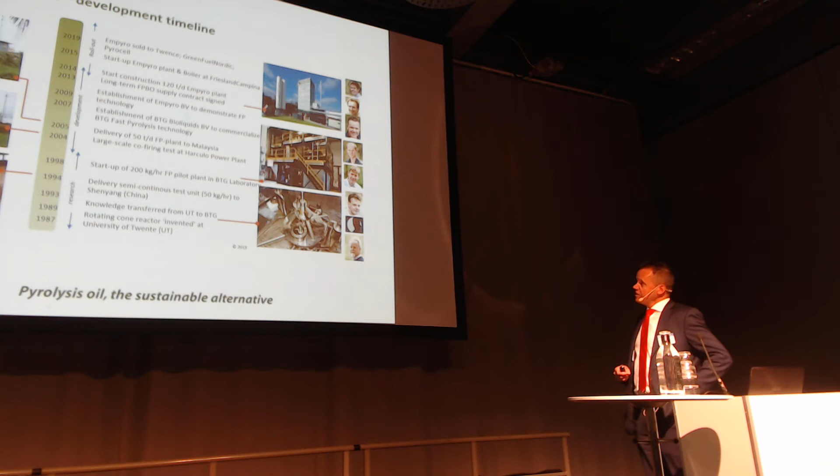What is exciting about this picture is not the technology, but the people. It's the people who make it happen. They invented the technology. They also improved the technology. And the funny thing in this picture is that all the people you see here still work with pyrolysis, except only one. Only one left us. The rest is still working with pyrolysis. It's the people who do it, not the technology.

What is fast pyrolysis? Very shortly, what we do is we heat biomass to around 500 degrees Celsius. We do it fast. That's why it's called fast pyrolysis. When you do it fast, the yield will be the highest. We are a kind of copy of Mother Nature. Mother Nature had more time. Mother Nature had around 200 million years, and we do it in several seconds. We convert the biomass into oil in 7 seconds.

That's not all. We're not only making oil, this is our technology. We are circulating hot sand and mixing it with biomass in our reactor. There's a kind of mechanical mixer of the biomass and the hot sand. This is how we achieve this fast heating up. We're creating a kind of oily smoke, and the oily smoke goes to our condenser where it's condensed. That's it. That's the total process. No catalyst, only temperature, and no pressure.

A very simple process; we believe it should be a simple process. No catalyst, no complicated stories, because why? We bring this technology to where the biomass is, close to the biomass. So no hydrogen, no catalyst, no complicated story, it should be a simple one. So decentralized technology to convert the biomass to crude oil. Then you can transport the oil and you can do anything you like with the oil. That's the concept. So heating biomass, getting the oily smoke out, and leaving behind the char.

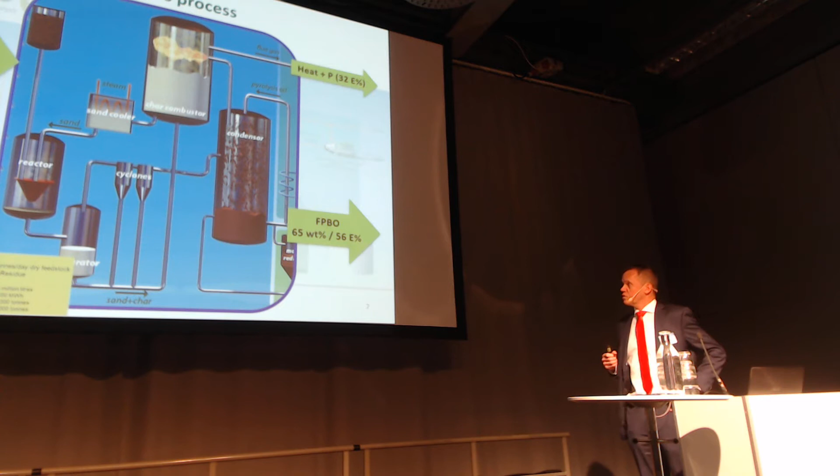Total efficiency is high, so we are converting around 5 tons per hour in, so every 1,000 kilo of biomass is converted to around 65% pyrolysis oil. And 32% is converted to heat, which we use efficiently.

Crucial to have an efficient technology. In the past, there was a lot of discussion about what is the best technology, what is the highest efficiency. I can tell you it's not about the efficiency itself, it's the total picture. It's more important to have a good price for your heat, for example, than to have the highest yield in your process. That's the total picture which is making it attractive or not.

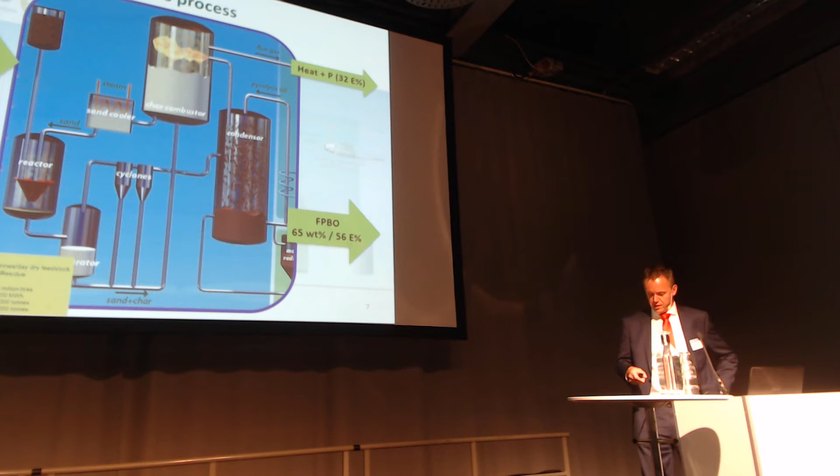March 2015, first oil was produced at Empyro. It's our first commercial plant. And to give you some idea, we made a lot of mistakes and we also learned a lot. And you can see it in this graph.

To give you some idea, in the first year, we produced 1,000 tons of pyrolysis oil. And now we're making 1,000 tons of pyrolysis oil per 2.5 weeks. That's a difference. The first year was not an easy year.

And to be honest with you, the funny thing was it was not about the core technology, but everything about all those practical, nasty things which are happening when you do something new. Typically speaking, if you would like to use a new technology, it would cost you around 3 years to reach maximum capacity and also a decent amount of handling costs.

That's really important, so I will not read everything which is here. Funny thing to say is that the plant is decent scale, 25 megawatt, and 7 operators in total are in the plant. So only 1 operator at a time.

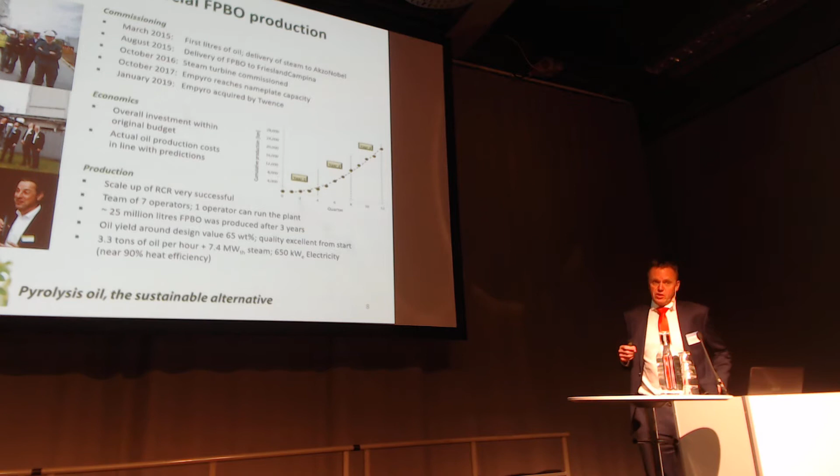We even are thinking to run the plant in night time unmanned. That's also called innovation. It's very important to lower your price and to make it interesting for the market.

We sold the plant in January 2019 to Twence. It's fitting perfectly well with our strategy. To be honest with you, there's also a surprise for us that someone else was interested to buy our existing plant, but it fitted perfectly.

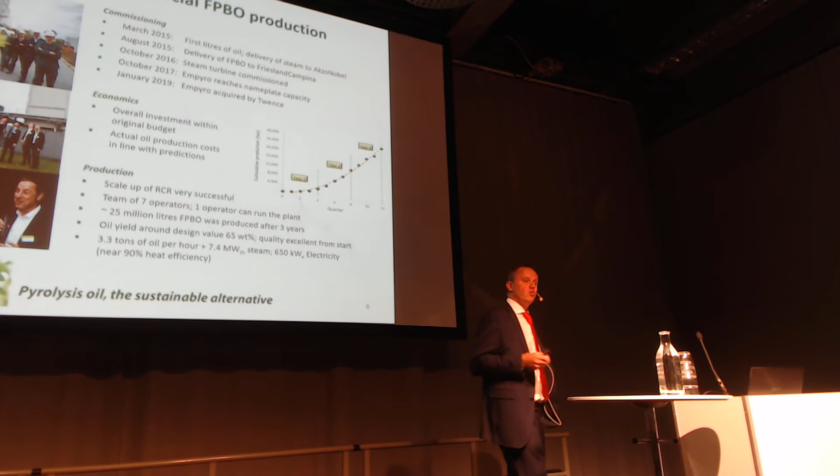Now we can concentrate on selling technology and doing projects, and Twence, which is an operating company, they can really run our plant in Empyro. We still have a 24/7 connection to Empyro, so we can still learn from the plant, which is crucial.

Go back again, March 2015 started with a pilot. Step by step also here, running steadily 24/7. Biomass was certified, crucial. We have the better biomass certificate. It's really considered a residue.

January 2019, and Empyro was acquired. In April this year, we sold our plant to Finland, GFN. And we just announced in September 2019 that we have sold our plant to Sweden, Pyrocell.

And the exciting thing about the last project is the fact that this oil is used by Preem in their refinery, which is a very big important step, because the refinery sector always said it's not possible to bring crude pyrolysis oil into the refinery.

If you repeat that to yourself and repeat it and repeat and repeat, then everyone starts to believe it. Preem said no, we believe it's possible. Whereas Petrobras in 2008, 2009 proved it's possible to bring this pyrolysis oil to a refinery.

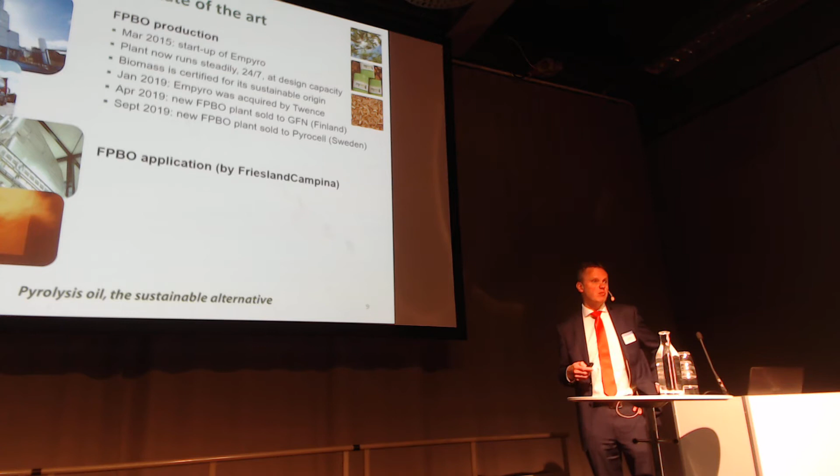I am very happy with the brave step of Preem. Also now I can see a lot of potential in the market. Other companies also want to explore this route. So there's always a long line for being number 2. And that's why I'm very happy that Preem has taken this very important step.

FrieslandCampina is using the pyro oil to replace around 10 million cubic meters of natural gas. And there's a total amount of greenhouse gas reduction of around 93%.

Commercial rollout. We are very proud that we have sold the plants both in Finland and in Sweden. It's costing a long time. We have to convince the market that things are possible. It's very important to spend time.

As I mentioned, you're around 11 years now for the company. And why did they choose our technology? That's a very important question. Due to the fact that we have Empyro, we have proven it's possible. We are making oil every day, 24/7. And that's the crucial thing. If you don't have the reference, people have difficulties to report.

So both customers, the Finnish and the Swedish, have been 5, 6, 7 times to Empyro to look at it. We have done a test with their biomass. It's also possible that if we have a specific biomass, it can be tested at Empyro. That's also what the customer has done. In both cases, we are using sawdust converted to pyrolysis.

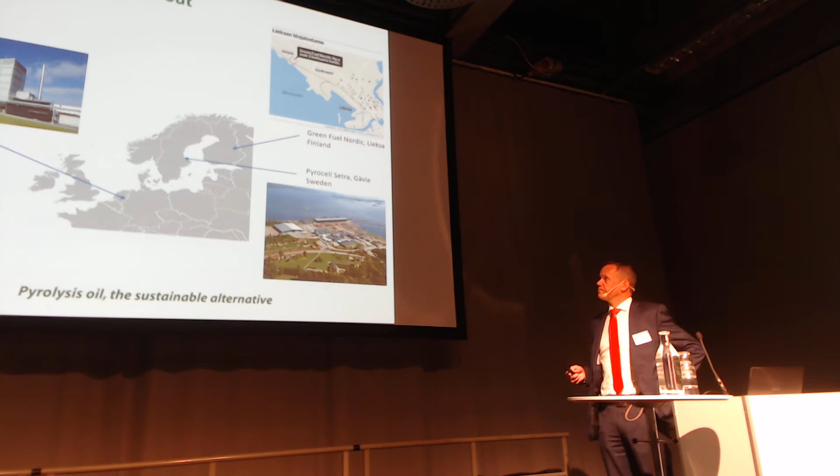BTG BTL is a relatively small company. BTG is around 35 people, BTG BTL is 10 people. So you can imagine that if you want to do a 25 million euro project, it's a challenge for customers - giving 25 million to a small company is exciting for them. So we decided to team up with TechnipFMC, a huge contractor in the petrochemical group, and we do projects together with them. Both the Finnish and the Swedish projects, we do together with TechnipFMC.

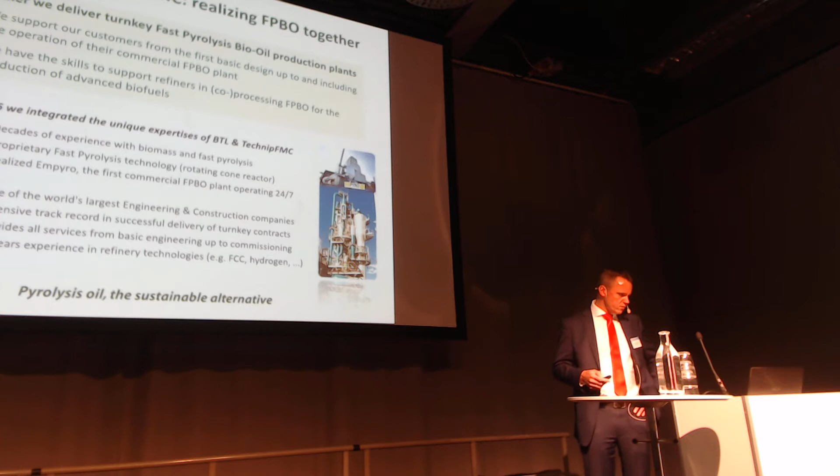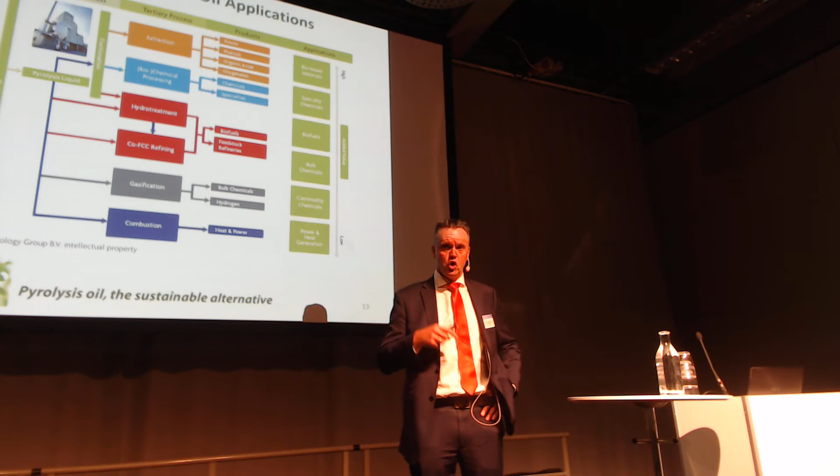That's the most interesting question. I think this morning Patrick mentioned it. It is very important to have an offtake agreement for everything. So if you have a high value added side and you don't have an offtake for the energy part, you cannot run your business. What we do is start a business with power applications and step by step valorize. Now people approach and say, could we use the pyrolysis to get some parts out? Yes, it's possible, because the residues can still go to the energy sector. Crucial - step by step, don't begin at the top.

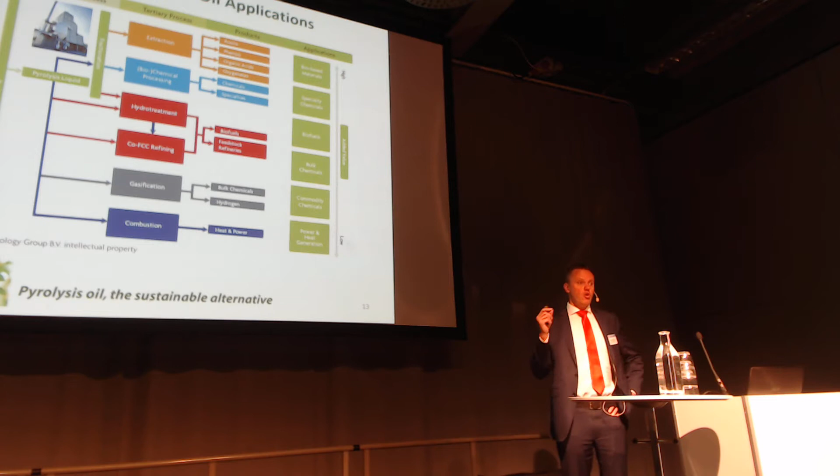It's fine if academia are investigating and researching these routes, but from a marketing perspective, don't start there. Start at the bottom and step by step go up.

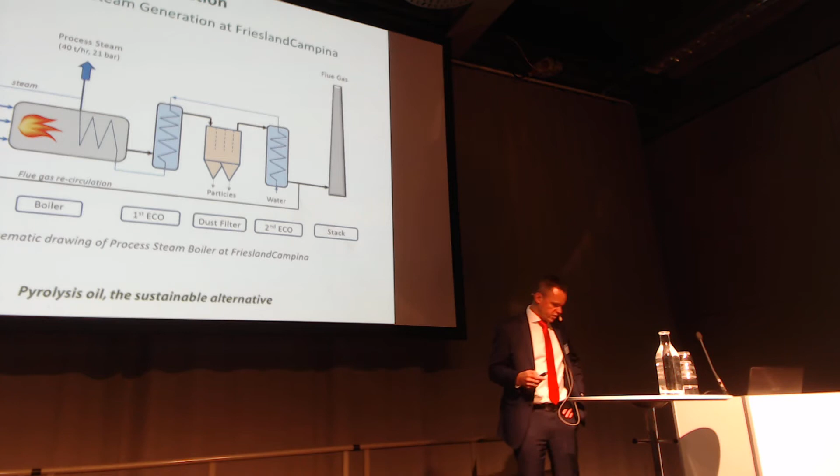Down to refinery - on the left side you can see our technology, and then there are several ways to go to refinery. The first one is untreated crude pyrolysis brought to an FCC refinery, under 5%. Easy, that's the first step. If you want to go higher, it's better to upgrade your pyrolysis oil - you remove part of the oxygen, and then you can go to a higher percentage in the refinery. Step by step, if you go to the MTF, you're making a complete end product, also possible with pyrolysis oil.

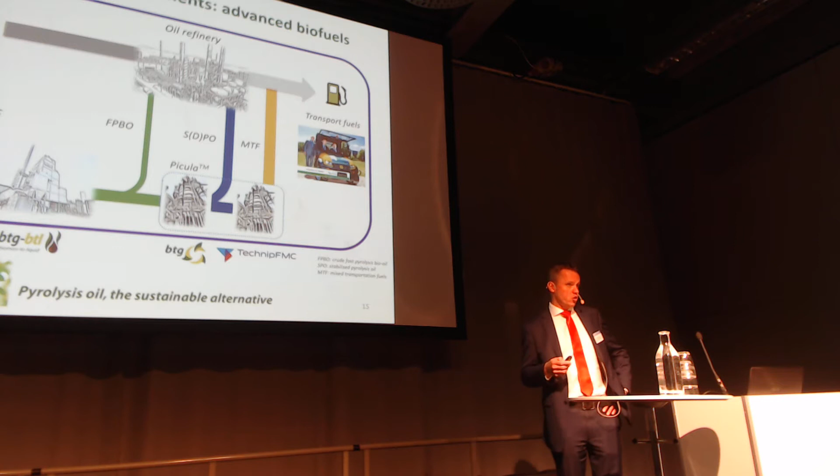This is how we do it - the cheapest way to go to a refinery to make second generation fuels. The other thing we need to do is make a connection on the riser of the FCC and co-feed the pyrolysis oil there. It's an investment of a couple of €100,000, that's it. Just feed it, and then you can see an interesting typical yield of the different pieces. We have dry gas, LPG available, gasoline, diesel, and also slurry oil. Up to 5% of this absolutely works perfectly.

The good thing is, by doing this, oil companies immediately comply with the Renewable Energy Directive - no investment, no couple of $100 million investment. Biomass owners will invest in the pyrolysis plant. The only thing that oil companies need to do is have an offtake agreement.

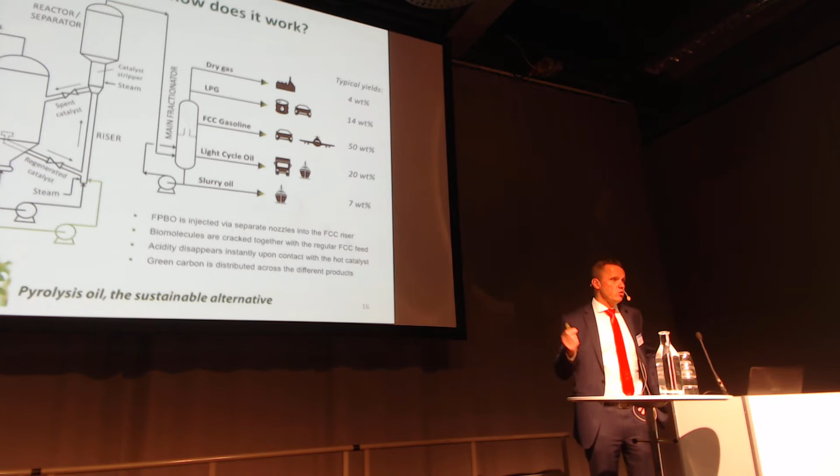That's it, last slide. With respect to time, I'll skip another point. In my presentation, at least I've given you an example of things which are possible at the moment. We are now rolling out this technology. My main market is especially Europe due to the Renewable Energy Directive, and especially here in Sweden, but also in Finland - it's an excellent market for our technology to start with. Thank you very much.

I have a question. What kind of products do you see as your main market, and why? Markets, products, like do you see feeding into a refinery as a main market in the coming years?

Yeah, I believe that feeding into refineries, that's our main market. It's supported all over Europe. And the second, also very interesting market here in Sweden and Finland, is to replace normal heat production. That's my two main markets: renewable heat in the boiler and feeding refineries.

Is there anyone having questions on this one? Those two questions. Yeah, thank you for your presentation.

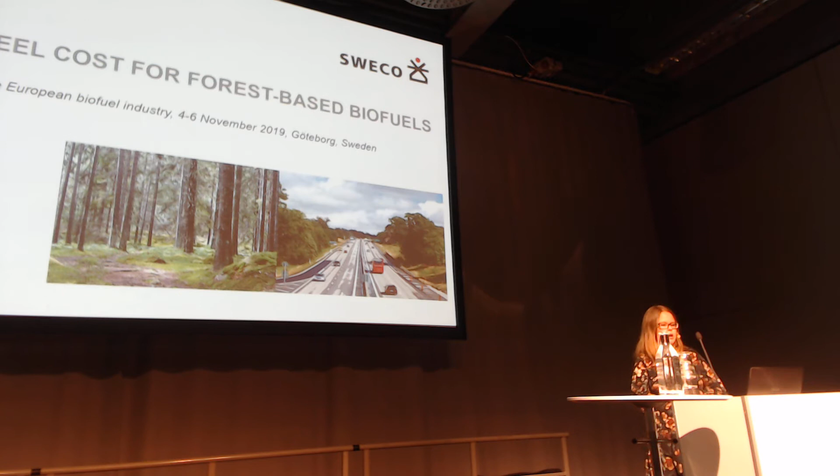The primary aim of the study was to estimate the well-to-wheel cost for forest-based biofuels. We focused on road traffic and usage in different segments in road traffic, and compared it with fossil fuels in this context. This comparison, based on the end user, illustrates how different renewable alternatives can compete with fossil value chains, and under which conditions there is potential for profitable biofuel production.

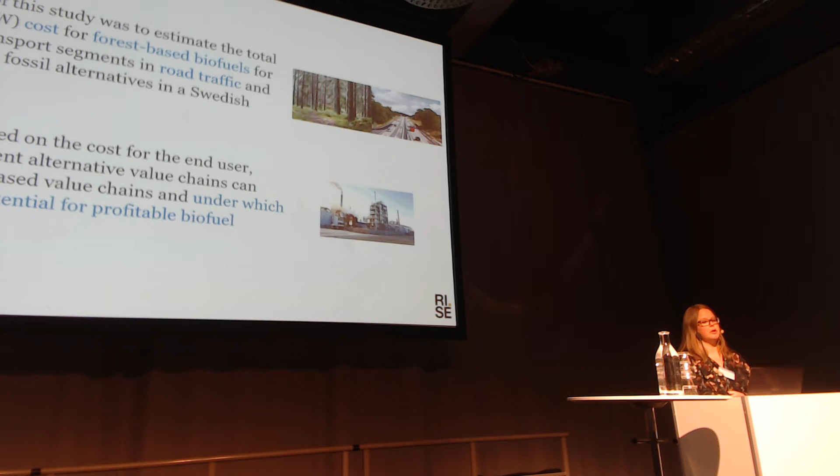Based on previous studies, we selected four different concepts for production of advanced or second generation biofuels: methane or SNG via gasification, methanol produced via black liquor gasification, a concept with ethanol and biogas, and a concept with renewable petrol and diesel from bio-oil, all integrated into existing industry to increase both energy and economic efficiency. For uses, we considered three different transport segments - here I will focus on the car segment as well as the long distance truck segment, but results for the distribution truck are similar to the long distance truck.

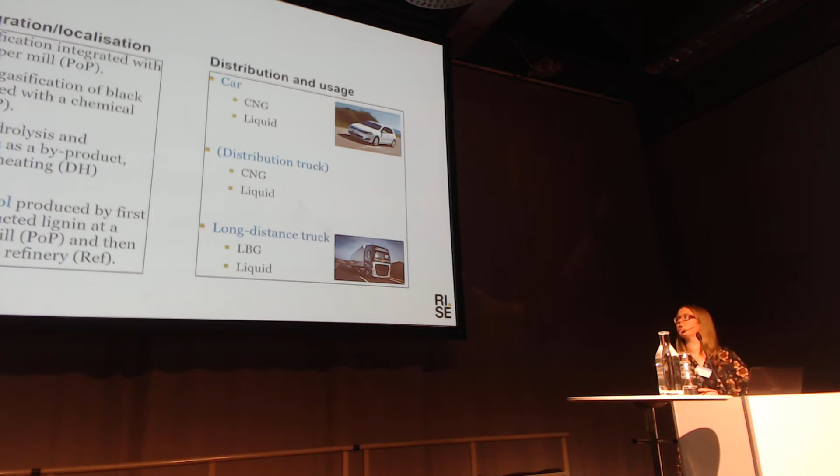So shortly about what we did and the main assumptions. This is the type of results that I will present. So the total well-to-wheel cost here, 2 examples with methanol and biopetrol for the car segment. And we indicated the cost for production, distribution, and vehicle, and compared it to a fossil reference.

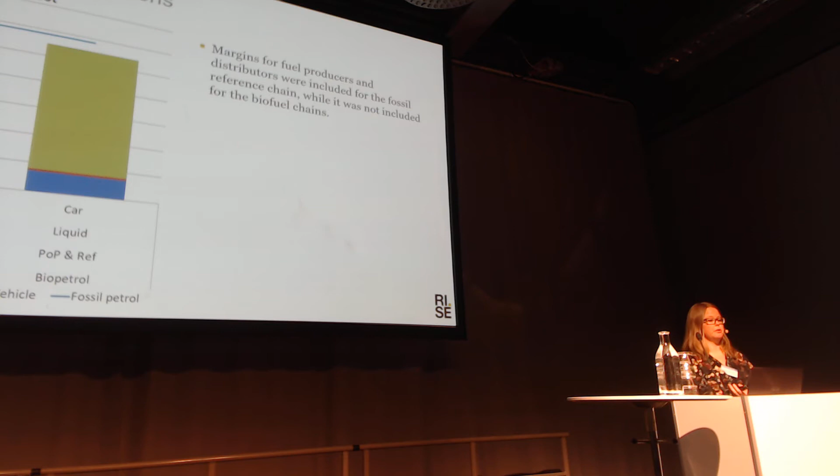And one thing is that for this fossil reference, we included margins for the producers and distributors. It's a total well-to-wheel cost for the end user. But for the biofuel chains, we didn't include any margins for producers and distributors. Instead, it's sort of a result from the comparison.

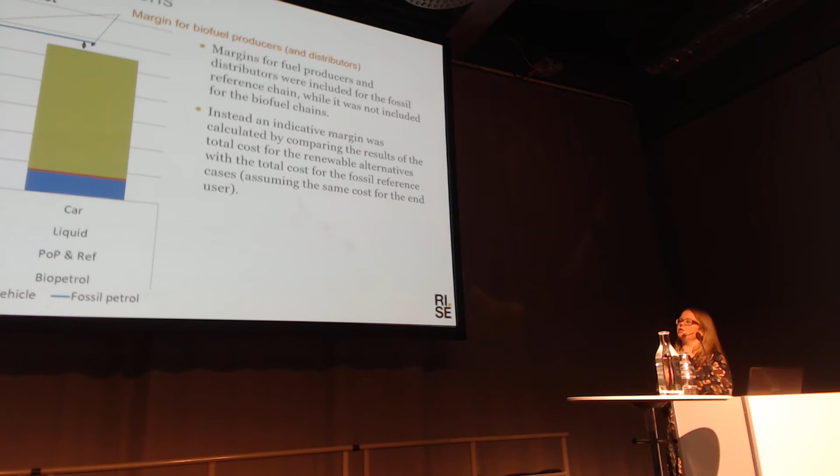So if we assume that the end user will have the same cost for fossil alternatives as for biofuel alternatives, we have an indication here: do we have any potential margins for producers and distributors of biofuels, assuming that the end user should have the same cost.

It's complicated to take it so short with so many assumptions, but we use current market prices in this study as well as the current policy situation in Sweden. But we have a time perspective that is 2030. So we, for example, assume that the technologies are in place, so to say, that they are commercial, and we have assumptions regarding, for example, plant performance. So that's quite important to stress.

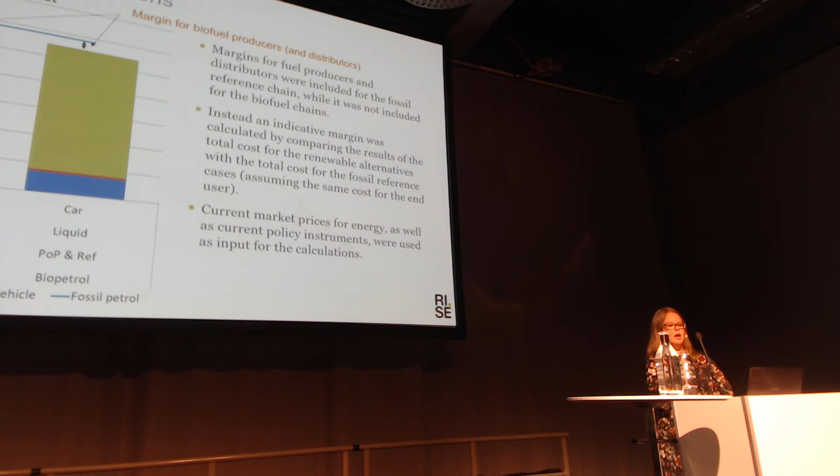And we looked at high blend or pure biofuels, so not drop-in. We consider all biofuels we study as high blend or pure biofuel, which in Sweden means that they have a tax exemption, so they don't pay the CO2 tax nor energy tax. So moving on to the results.

Here we can see the total well-to-wheel cost for the studied value chains for the car segment, and for those production concepts containing 2 different biofuels, we present the result per biofuel using energy allocation to make it more transparent. We can see here for the car segment that the dominating cost is the vehicle cost, dominated by the actual purchase cost per vehicle divided into cost each year.

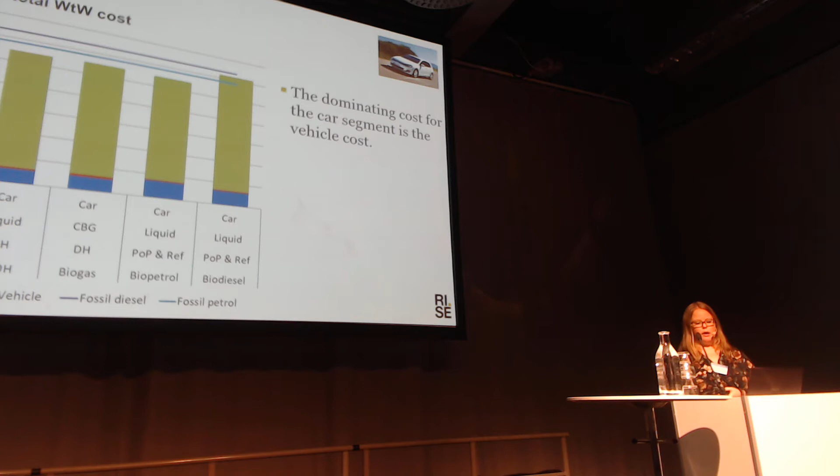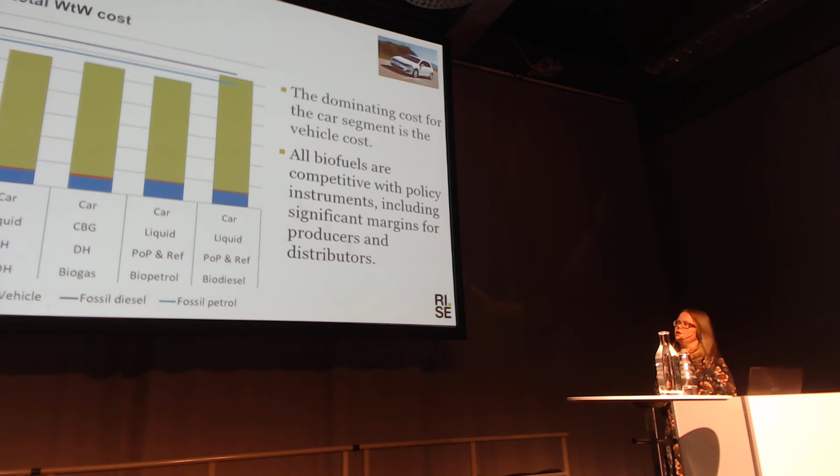And if you compare these first ones to fossil petrol and biodiesel to fossil diesel, we can see that all biofuels are competitive. And we actually have significant margins for producers and distributors. Maybe a margin in crowns per kilometer doesn't say that much.

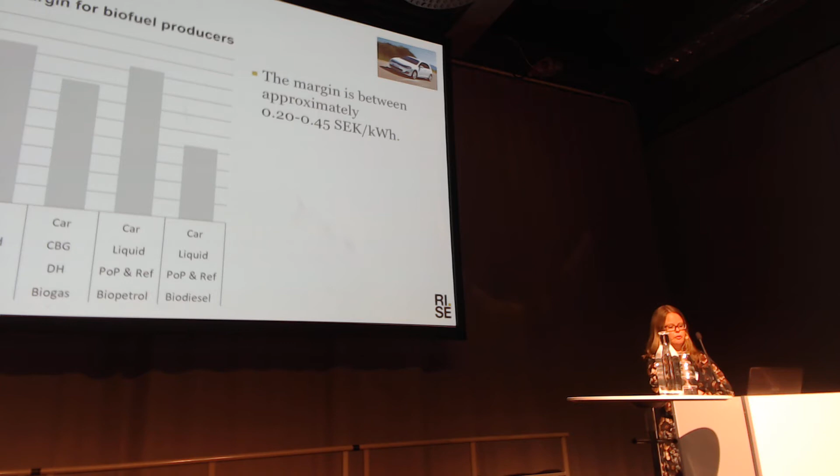So if we convert the margins to crowns, approximately 10 crowns is €1, per kilowatt hour biofuel, we have a margin between 0.2 and 0.45 crowns per kilowatt hour for the different biofuels. And then how important is this tax exemption from the energy and CO2 tax? It adds about 0.7 crowns for petrol and 0.5 crowns for diesel.

So then one can conclude, looking at the numbers here, that without these policy instruments, the biofuels are not competitive compared to fossil fuels. In the study, we present results both with and without policy instruments, so we make the effect clear in the report. I don't have the time to show all the results here.

But in addition to the sensitivity analysis when it comes to policy instruments, we did quite an extensive sensitivity analysis for a number of factors. The one shown here is actually the one with the largest impact, and it includes, for example, the biomass price, the crude oil price, and how you price the excess heat from the biofuel plants that is used at the host industry.

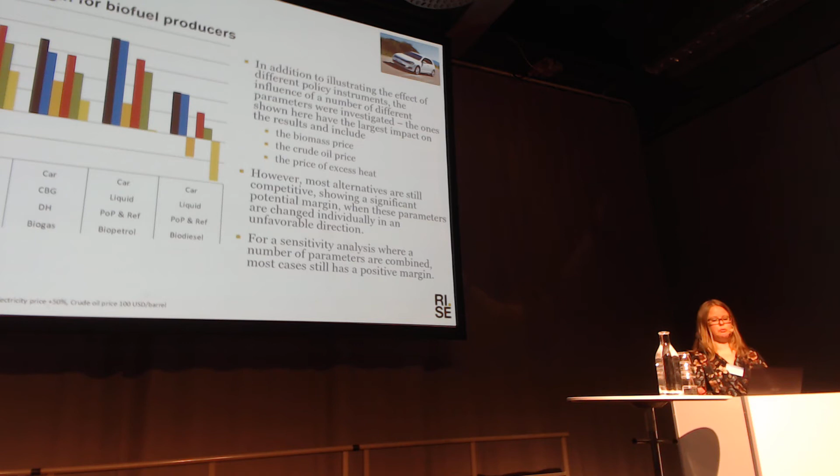But we can see here that most alternatives are still competitive, and we still have significant margins even when we change these parameters in an unfavorable direction for the different alternatives. But we can see, for example, that this biodiesel is quite sensitive to changes. In the sensitivity analysis, we combine a number of factors, but still we have a positive margin for almost all the alternatives studied.

Moving on with the long-distance truck segment and the results there, and the total well-to-wheel cost first. The first thing we can see is that the vehicle cost here is less dominant compared to the car segment, and the reason for that is that the average distance traveled by a long-distance truck each year is much longer than a personal car, and of course then the variable cost becomes more important for the truck segment. And also here we can see that all biofuels have lower cost compared with the fossil reference.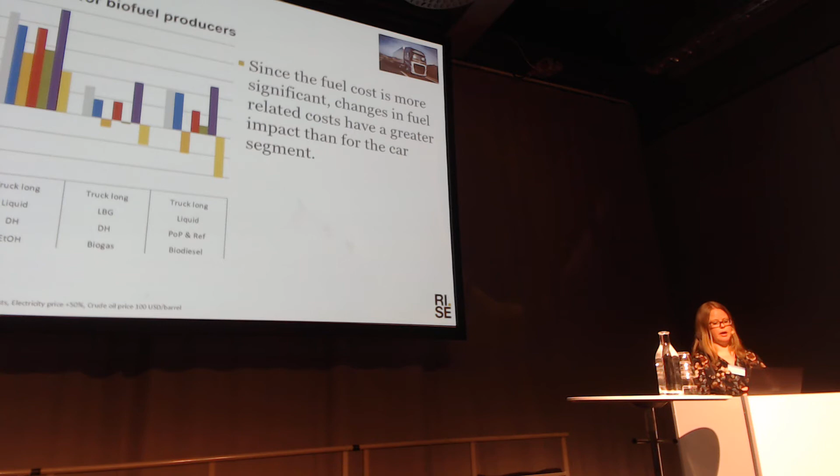And since the fuel cost or the variable cost has a more significant share here for the truck segment, the results are also more sensitive to changes of those parameters. For example, here we can see that both the biogas and biodiesel value chains have small or even negative margins for some of the parameters studied in the sensitivity analysis.

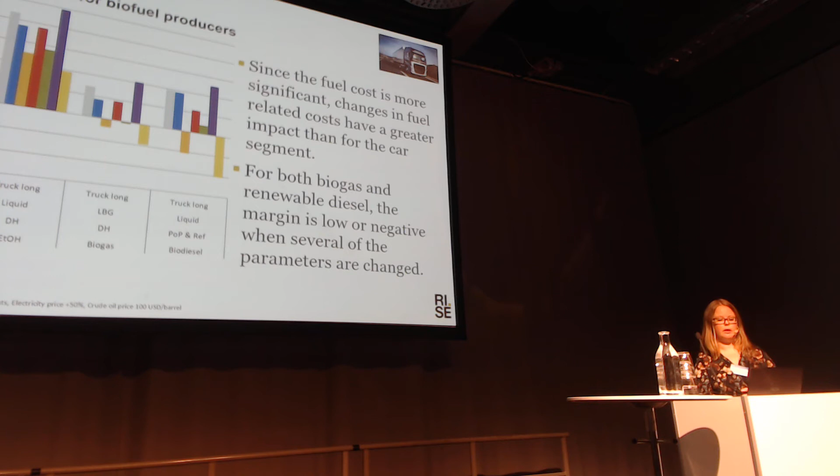So, moving on to the summary and conclusions. All the studied value chains or biofuels in this study have the opportunity to be profitable with the current policy situation in Sweden. Here's a summary showing the margin for both the car segment and the long-distance truck segment. Looking at the specific biofuels, methanol and ethanol actually have the highest average potential margin for producers and distributors, which is also very stable across different transport segments. But also SNG and biopetrol have very high potential margins.

I can say something about the size of the margins because you can relate them to the production cost for the biofuel that we estimated here, which is between 0.5 and 0.85 crowns per kilowatt hour. And also the Swedish Energy Agency estimated the margins for production of fossil petrol and diesel to between 0.1 and 0.15 crowns per kilowatt hour.

Biodiesel and biogas have a somewhat lower but still relatively high margin, but they are more uncertain, and when changing certain parameters, they will have very small or negative margins. And if we look at the production processes, which in some cases are a combination of different biofuels, it's the methanol, SNG, and ethanol-biogas concepts that all have significant margins also when parameters are changed radically. This is not the case for the biodiesel-biopetrol process.

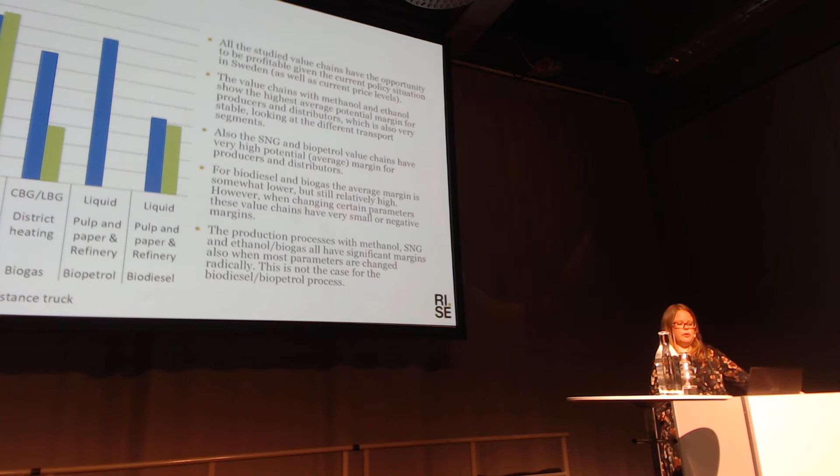Olaf from the Swedish University of Agricultural Sciences. Can you elaborate a little bit on the production costs? They look quite similar for the different fuels. Yeah, they are quite similar. As I said, it's in the range between 0.5 and 0.85 crowns per kilowatt hour, and it's lowest for the SNG process and highest for the biopetrol-biodiesel concept, and the other ones lie in between.

So it's the production cost we estimated using current market prices for both biomass and other chemicals. And we assume, as I said, that integration is a very important issue here. All the processes are very energy efficient and integrated into existing industry, and that also reduces to some extent the capital investment, using existing infrastructure and replacing their need for investments in new heat and power capacity.

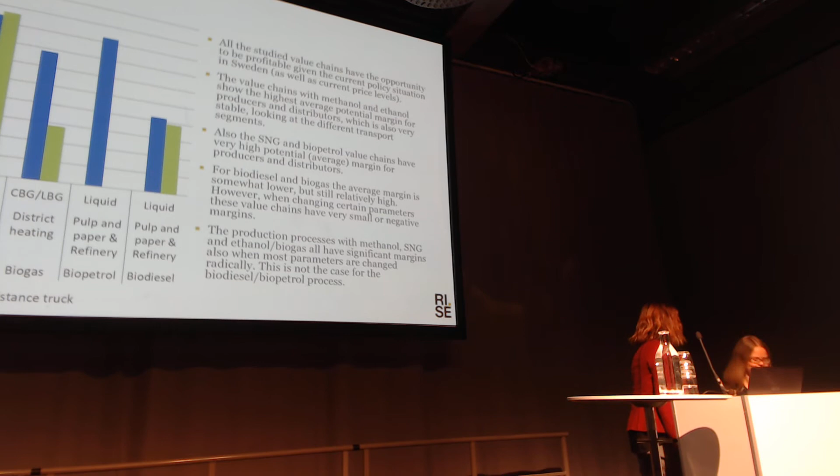And now we have the next one with the bioethanol, replacing Olaf Trygve Berglihn, and he is going to walk us through how to distill the ethanol in a hybrid process. Looking forward to it.

Thanks for the introduction. My name is Bernd Wittgens, working for SINTEF as a senior advisor, and as Judit said, I'm replacing Olaf Trygve Berglihn, who was supposed to give the presentation. The previous presentation was basically on costs. Now we try to find out how to modify the process and reduce the production costs.

The outline: how is ethanol produced? We need to get rid of the water. What kind of experiments have we done? And how to integrate two completely different processes into one process, which makes it better. And then some conclusions and an outlook.

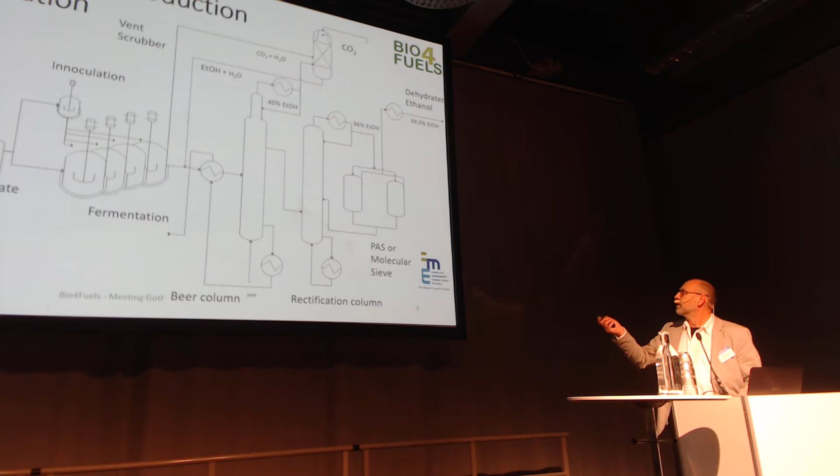Bioethanol is produced by converting some substrate into hydrolysate, meaning make sugar, run them through a fermenter, and then current technology is we use two distillation columns, first the beer column and the rectification column, and then we have to get rid of the rest of the water by, for example, a molecular sieve process. Those processes are relatively well known. They have one challenge: they are energy intensive.

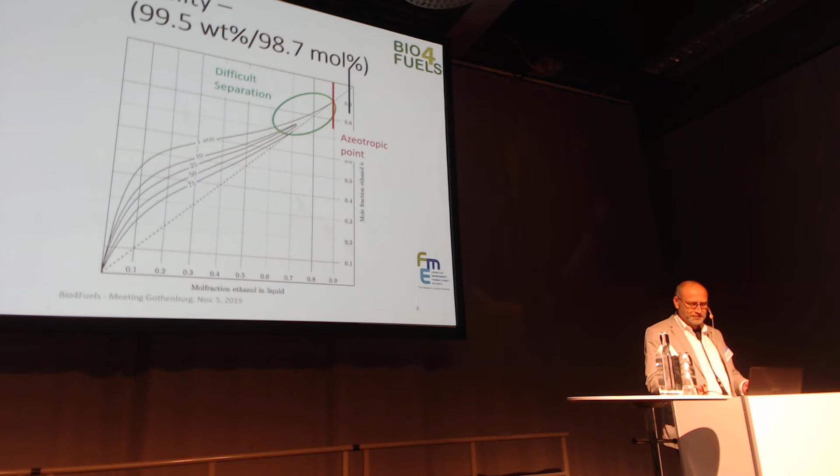When we want to have fuel, we would like to have 99.5% weight of ethanol. The problem with ethanol and water is you can, by distillation, only get to a certain point, and then you can't separate it anymore. So you need to have a second process behind that. We looked into that, and we had a project which started with a bioreactor, putting the membrane system into the bioreactor to get the ethanol out of it. Very nice idea, doesn't work. It's that simple. So we need to find an alternative way to do that.

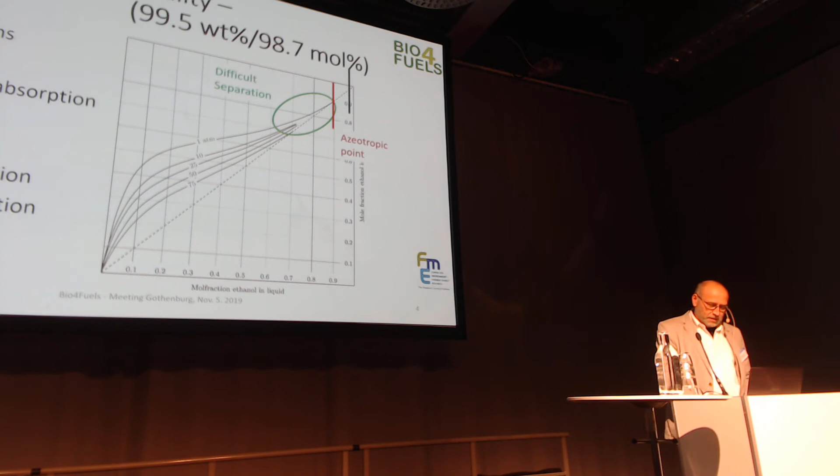So we went back to our initial idea. We run the distillation for the first part, and then we take the difficult separation part to other processes. And we looked into 5 alternatives. The interesting part with these 5 alternatives is they bring you from your physical limit, which is the azeotrope, to your fuel concentration.

A little bit on membrane separations. What's the problem? The problem is very simple. If you run a pervaporation process, that means you drag ethanol as a vapor through the membrane and you put it into the broth. You have particles in your broth which foul the membrane. That means it will clog in no time. You have a very poor driving force.

Let's say you start with 5% ethanol in a water mixture, which is standard for a fermenter. You want to get up to 70 to 80%. You use a lot of energy for that. And your product, ethanol, has to be condensed at a very low pressure. That means you need a very low temperature, which costs, again, a lot of money. So that baby doesn't work.

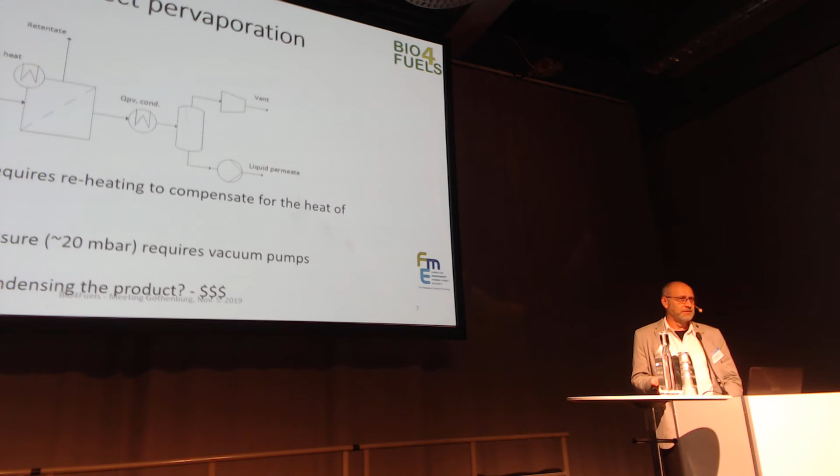So when we ran that project, we ended up with vacuum pumps which need to be operated at 20 millibar absolute pressure. Every engineer will say that costs a fortune. The other part is if you want to condense your ethanol at 20 millibar, it's even more expensive. So we put that to the side.

And then we looked into whether we can make a trade-off of our driving forces. So we came up with a very counterintuitive idea. If you increase the pressure in the distillation column, your separation gets worse. But on the other hand, if you increase the pressure, we have a higher driving force for our permeation process. So balancing these two is basically the key to what we've done.

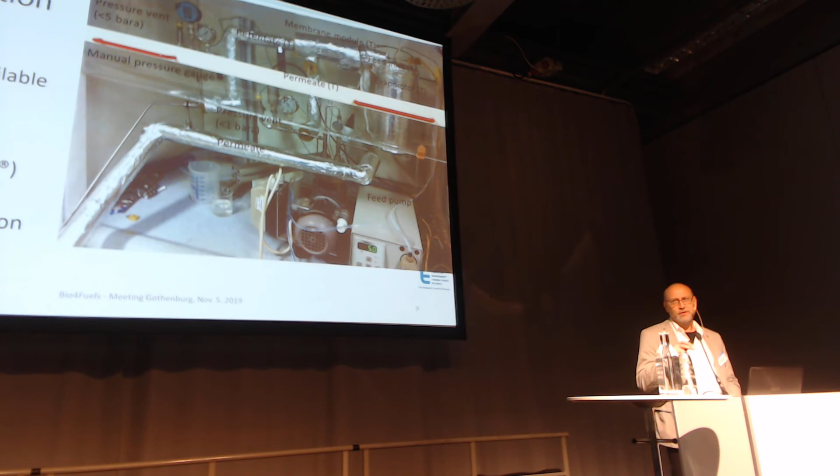So we built a small system, used a commercial membrane for pervaporation, which is actually not designed for that process. The membrane is designed for feeding a liquid into the membrane system and drawing out vapor. What we did, we fed vapor into the membrane, which the supplier told us in the start is not possible.

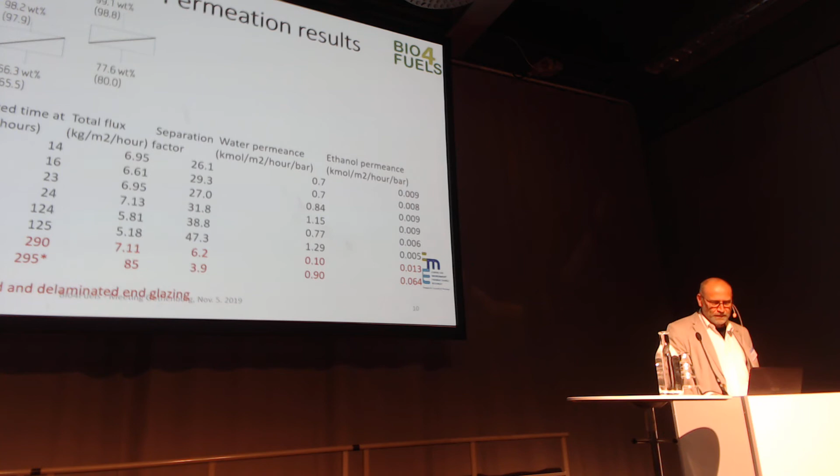Of course, we tried, and surprisingly enough, it worked for quite some time. See the operation times, we operated it for about 125 hours. We get quite a high flux through the membrane, and then our membrane broke down. And that was because we run the system up and down all the time, and the membrane is not made for that. So, as the previous presenter said, we learn from our errors. So we made another system which we operated in a different way, and that worked for quite some time.

So how does the process look? We still have a distillation column in the start, and then we exchange the second separation column, the dewater and the dehydration section, with one membrane section. So we basically reduce more or less 60% of the process capital costs. They're removed. So we get a much simpler process. Okay.

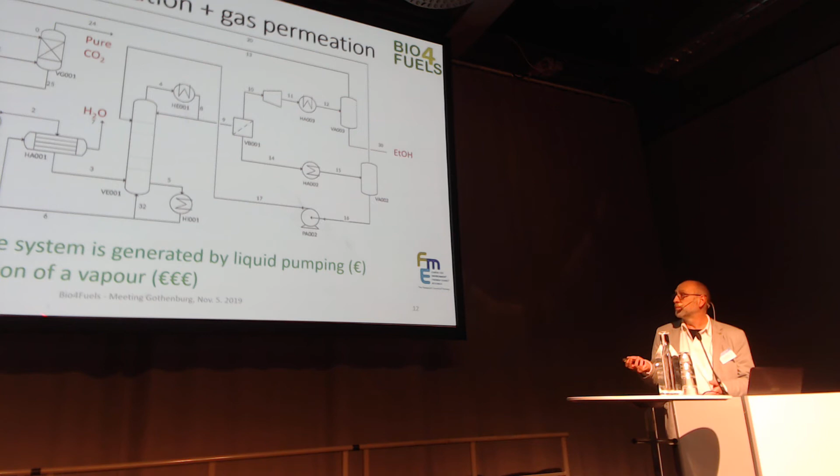And why is it much cheaper? Because we generate our pressure by pumping a liquid. This costs close to nothing. Compressing a vapor is relatively expensive, especially if it's a vapor which additionally condensates, which makes it even more complicated.

So then we ran the energy analysis of the two processes. We compared them. We used data from an NREL paper from 2011. They have two distillation columns, a molecular sieve section, and the separation costs about 7.4 megajoule per kilogram, just for the separation costs. We leave out the cost for the feedstock or the fermentation, just to make it simpler.

In the process we developed, we have one distillation column and a gas permeation membrane. The data we get from Pervatech and our own data are about 9 kilogram per hour per square meter membrane, which is quite large compared to the original data, but that's because we feed in a vapor, not a liquid. So we reduce our energy consumption by about 18%, which is quite substantial because the distillation is a major energy consuming part of the process. So if you get down this energy consumption, it also reduces your operational costs.

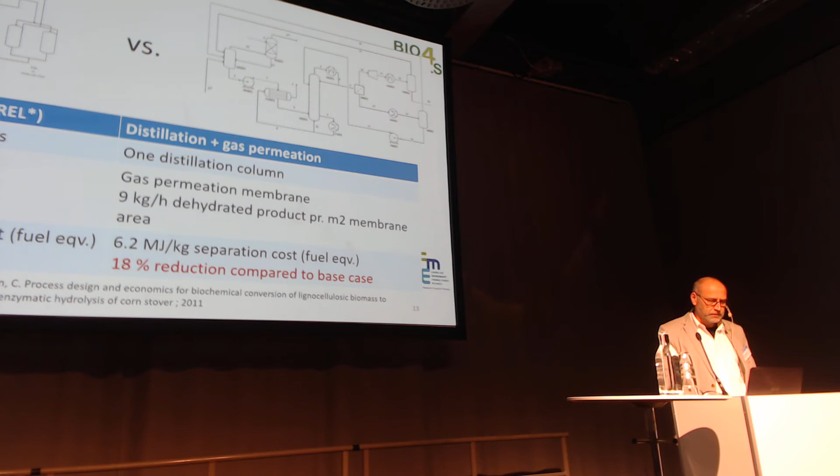Conclusions? Integration of distillation and pervaporation. It's a classical process intensification approach. You take the simple part of the optimal operation range of two processes, integrate them, and you get a much better process. However, we have to make a trade-off between the separation efficiency in the distillation column and increasing the driving forces for the permeation section. So it's not straightforward. You have to play with it and find the right combination.

It's a very much simplified process because those membranes will never ever foul. All the fouling is happening in the distillation column and beer column, and that is handled in industry. We have done that for about 2,000 years to produce alcohol for drinking, so that problem is quite easily solved. We have a much better energy performance with the scheme we designed, and we have comparable or lower capital cost with the proposed scheme.

But there's a drawback. It works only for processes where we have a low boiling alcohol, a low boiling liquid. Our solvent is water, which has a 100-degree boiling point. Ethanol has 78.4 degrees, so that works nicely. If you were to produce butanol, it will not work. Butanol is a higher boiler than water. So we need to play with that a little bit more to see if we can use it in the same way.

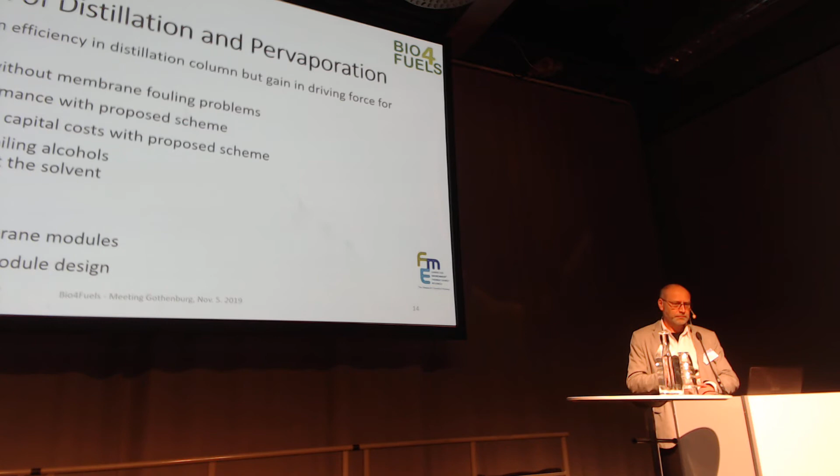Where are the challenges and the outlook? The membrane modules today are relatively costly. And as you've seen, they have a tendency to crack. So we need to make them more robust and we have to reduce cost. And also we need to perform a rigorous technical and economical evaluation, and that is ongoing in the Bio4Fuels project. That concludes my talk, and I will be happy to answer your questions.

Very interesting. My question is, where you are at this TRL scale, how far is it from real commercial value? None of the systems is new, everything is industrial scale. It's just the integration of the systems which is different. So basically, each individual process is TRL 9. Integrating them, I haven't seen that in industry, but it has been done in pilot runs, but for a different application.

Because what you do is, in the separation step, you're not separating the alcohol from the water, you separate the water from the alcohol. So you drag the water out of the system, which, after you distill it up to 60–70%, is the simplest way. And those membranes are readily available, and they are relatively cheap. But the integration has not been done so far. Do you see a potential for retrofitting existing plants? Yeah, definitely. Okay. Any questions from the audience?

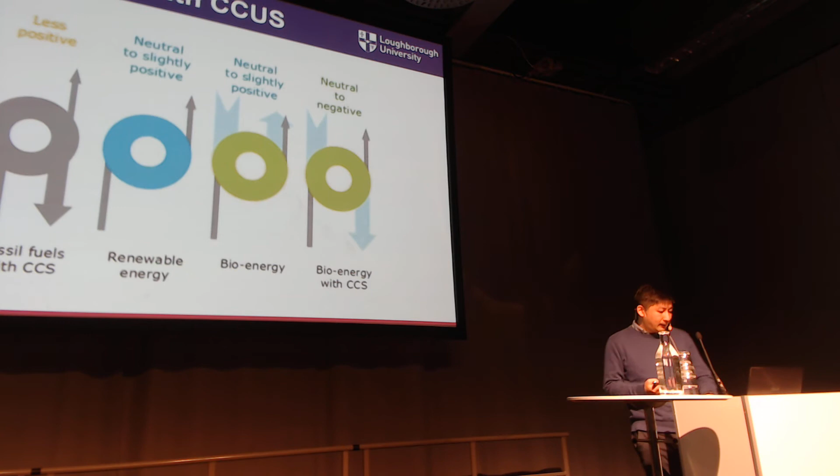So Supergen, the Bioenergy Hub and the Department for Transport released a call for this flexible grant, and they asked us particularly to look at bioenergy together with CCUS, carbon capture, utilization and storage, because BECCS is one of the very few solutions that can provide negative emission energy supply. If we think bioenergy is neutral to slightly positive carbon emission, then bioenergy with CCS or CCUS will give us a solution of neutral to negative carbon emission. We don't need the entire national energy supply to be carbon negative, but if we want to achieve net zero emission by 2050, we do need a proportion of energy supply to be carbon negative.

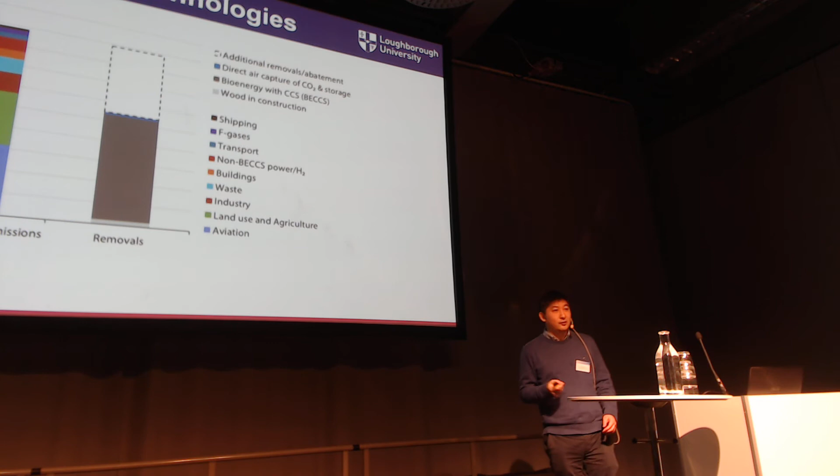And as you can see, there's still a blank area here where at the moment we don't know how to deal with this carbon emission residue, which means probably we need to move forward the state of the art of bioenergy with CCS to enhance its potential so that it can offset more carbon emissions.

So as I said, biofuel with CCS will play a very important role in the UK's emission removal and offset. And so with this content, we propose a so-called e-biofuel-based circular economy concept.

So the core is to use the electrochemical process to develop biofuel and at the same time reduce carbon dioxide into useful fuels. So if we start from renewables, biomass, or waste through different bio-based processes, for example fermentation, then you will probably get some intermediate like carboxylic acid. That intermediate itself is a useful molecule, but sometimes, or in most cases, we want to upgrade it into fuels or more value-added chemicals.

We can do this through an electrochemical process with the input of renewable energy. For example, we can get more energy-dense alkanes from the carboxylic acid. The fermentation process will generate quite a number of carbon emissions, and of course the end use of the fuel will also generate carbon dioxide and waste.

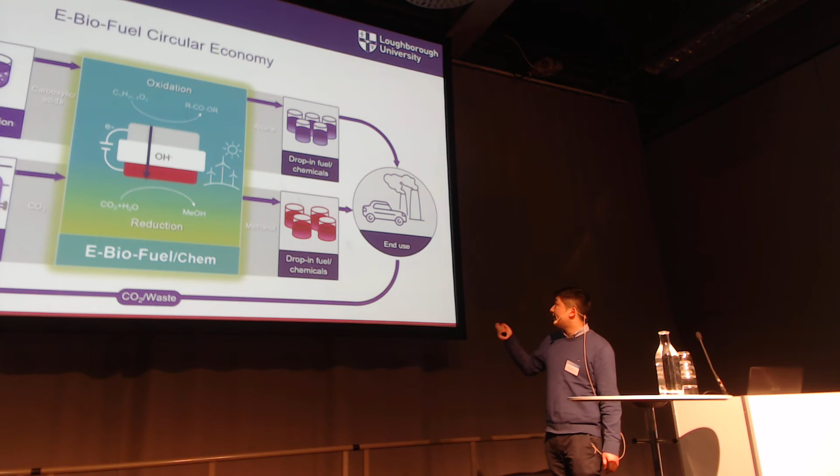So if we integrate carbon capture and use, again using the electrochemical process to convert the carbon dioxide into something useful, typically methanol, ethanol, or formic acid whenever possible, then you can get two types of fuels, two streams of fuel production on the same electrochemical unit or process, and then you close the loop of the carbon to achieve potentially sustainable and negative emissions.

So I would elaborate a little bit more about the fundamental science and chemistry behind this idea. As most of you know, the electrochemical process typically involves two types of half-cell reactions, the anode and the cathode - one is oxidation, the other is reduction.

So if you want to reduce the CO2, it's a reduction process, which means at the cathode you reduce the CO2 into some fuel like methanol. And it has to be accomplished with an oxidation process, most typically the oxidation of water to generate oxygen. The only useful part is the CO2 reduction, but more than 90% of the energy is actually used to overcome the water oxidation - only 10% of the energy would actually be used for CO2 reduction.

The same applies for biomass valorization. It can be both reduction and oxidation, but here we talk about oxidation - for example, selectively oxidizing the carboxylic acids into alkanes. Then you need to accomplish this with another half-cell, water splitting, and again more than half of the energy is wasted here.

And with the oxygen generation this also causes problems in these kinds of systems. So our idea is to get rid of the unuseful part and combine the useful electrochemical reactions to generate this new e-biofuel system, or bifunctional electrochemical system. So on one side we reduce the carbon dioxide to methanol, and on the other side we selectively oxidize the carboxylic acids into alkanes, so that we maximize the usage of electrons and the energy in the electron flows.

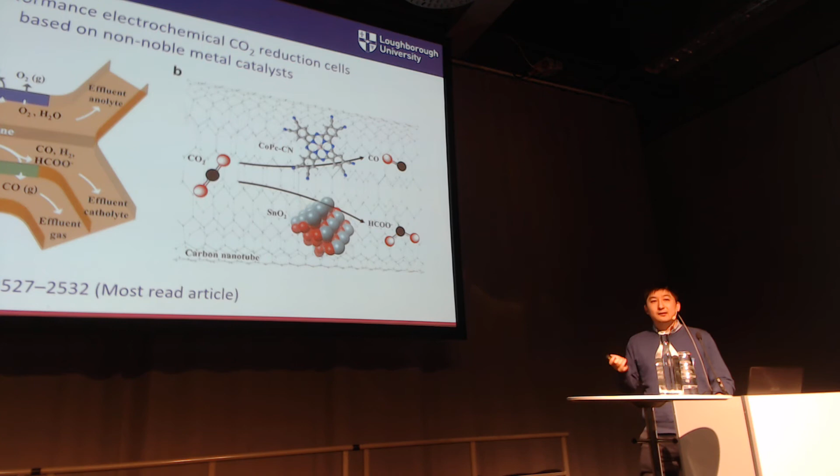So this project is essentially to use this chemistry and build a novel process that can do both jobs at the same time - a synergistic integration of anodic carboxylic acid upgrading and cathodic CO2 reduction. The ultimate goal is to intensively reduce emissions and increase the sustainability of the road transport sector. So we want to build road transport fuels through these new processes.

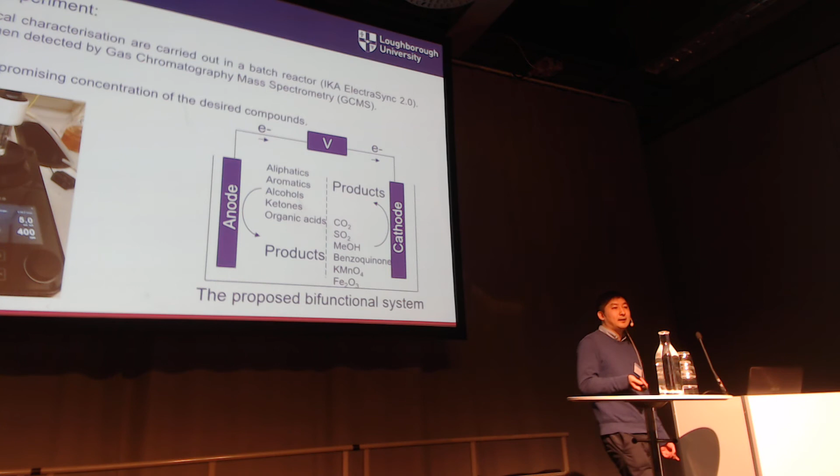Throughout the last 6 months we got some initial results. The project is proposed in 3 work packages. The first is about experimental work to prove the concept, using state-of-the-art electrochemical cells to study the fundamental electrochemical kinetics. We actually did more than we proposed.

So we screened a series of anodic oxidation processes, like different bio-based molecules - not only organic acid, but for example alcohols or even methane oxidation to energy-dense fuels. And in that case, we screened CO2 reduction, but also other options like SO2, methanol reduction, etc. We did generate some exciting results, and we believe some of the results can generate patentable IP.

So with the help of the University Enterprise Office, we are currently engaging with the Midlands Innovation MICRA. We are very likely to get another grant of funding more focused on the commercialization side. Because of this, I cannot disclose too many technical details because we are looking at a patent later.

And then the second work package is about the modeling part. So we developed a numerical model to screen a number of reactions. The model is first validated against experimental data, and once validated, we have extra information from the literature.

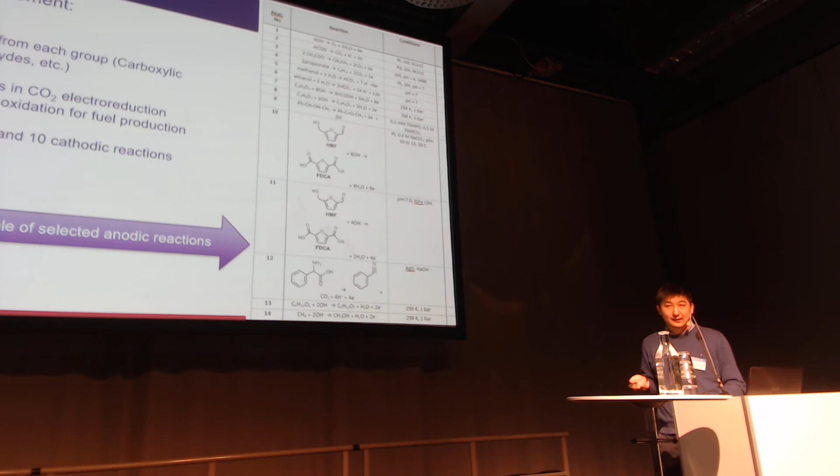So we selected 20 anodic and 10 cathodic reactions, different options, all from the literature. We supply the kinetics data into the model, so it generates performance results, and we can see which one is better than the others.

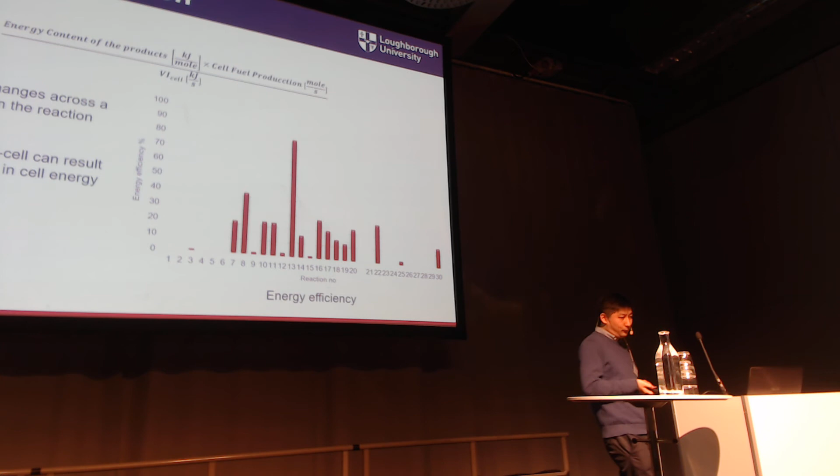I mean the criteria we use to screen different types of reactions. The first is about energy efficiency, because this process does involve renewable energy input, so we want to see the cell energy efficiency. You can see some are more efficient than others because of the inherent kinetics, so some are much easier to perform.

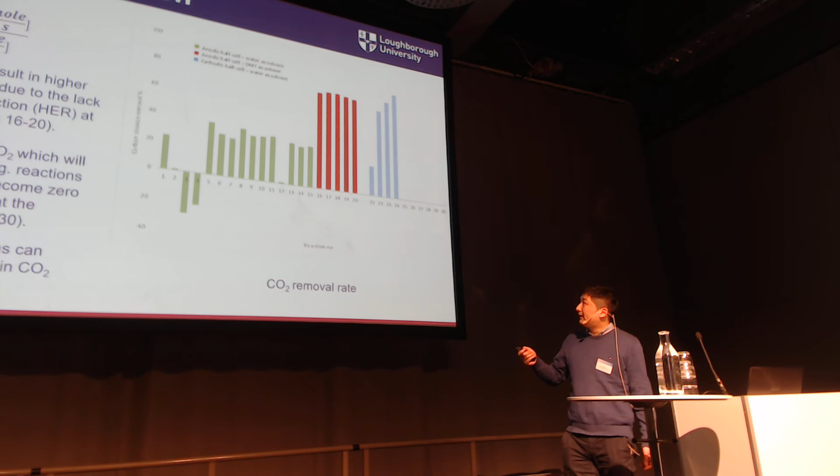We also look at the CO2 removal potential. Eventually we want to remove as much CO2 as possible from the reaction, so we look at the number of CO2 reacted over the number of CO2 fed. You can see quite a number of reaction options can reach more than half CO2 removal rate.

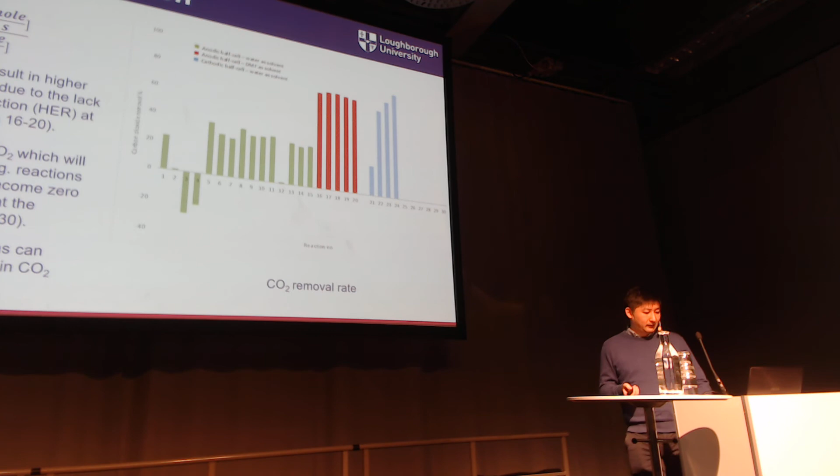Some are higher, some are lower. But if some reactions generate more CO2 than you supply, you get a negative value. So this is probably where we want to choose these kinds of options.

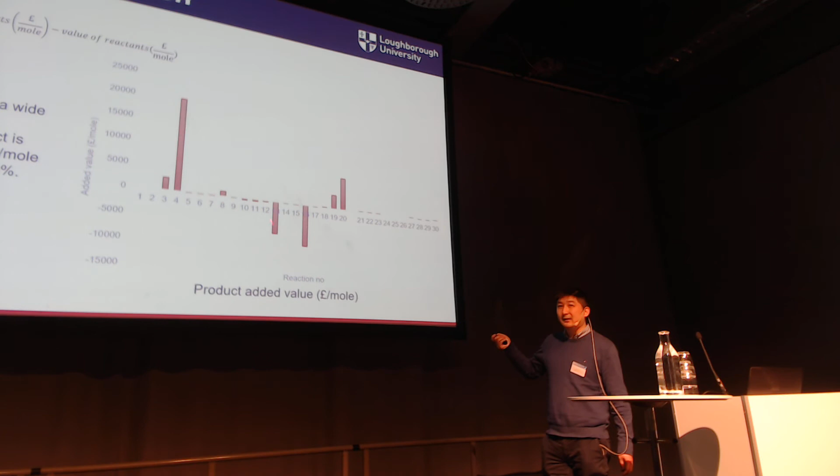And we also look at the economic analysis. We want to compare the value of the product to the value of the reactant, so again it varies very much. Some reactions will generate a very high value-added product, while with some, when you do the reaction, you are losing money.

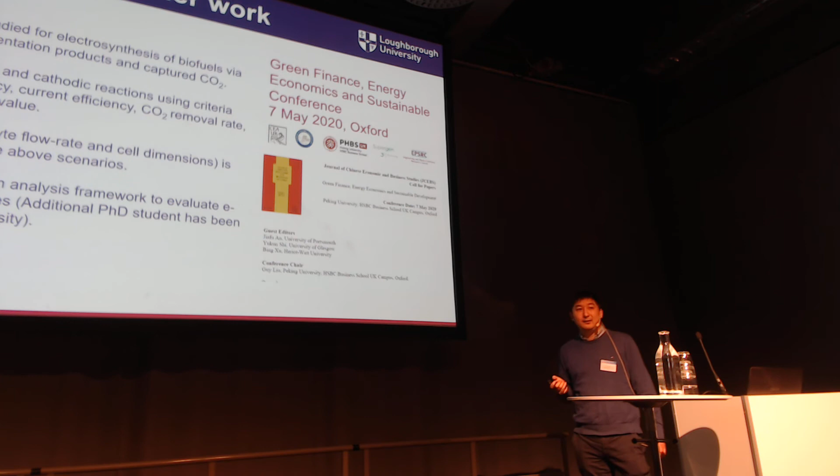And at the end of this project, we will have a workshop associated with it to talk about green finance, energy economics, and sustainable development. The idea is that at that point we will have more solid data, so we want to engage with the business side of the sector to find ways to commercialize our technology.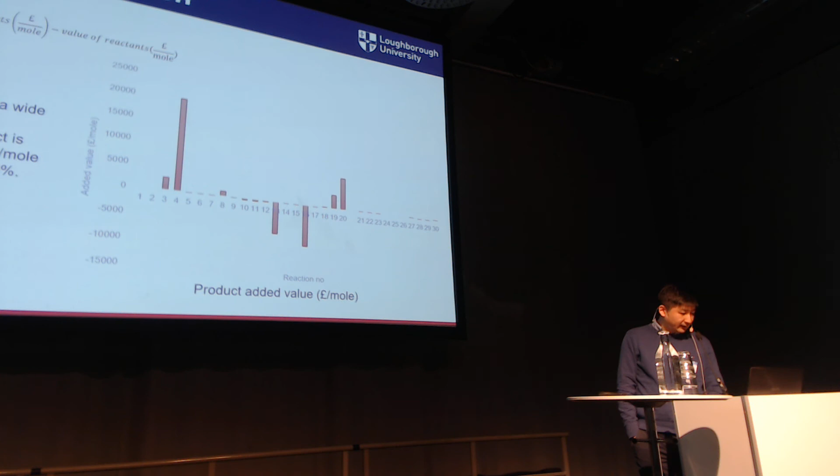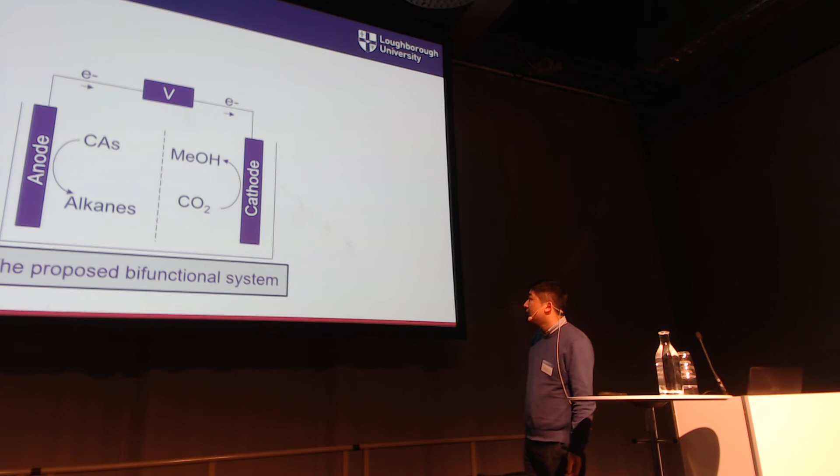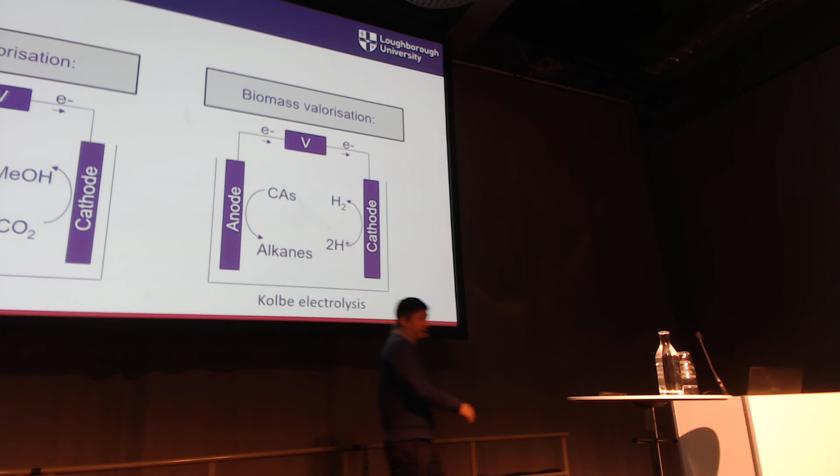So what reactions actually require the use of hydrogen? Where does that come from? There's no hydrogen. I mean, so the story is, if you want to do an oxidation reaction, for example to selectively oxidize CAs into alkanes, then you need to split, there's a reduction reaction associated with that. So normally people do water splitting, so you generate hydrogen from there. So I mean, you see that's hydrogen, but at this low volume, you cannot make money from that. It only induces dangers to the system. So we remove this part. Basically it's this bit combined with this bit to form the new system. So there will be no hydrogen generation in the new system.

Yeah, to change the carboxylic acid to an alkane, you're adding hydrogen. Where does it go? Yeah, so it can be from the water. The Kolbe reaction is decarboxylation on top of an oxidation. That's why it looks strange, but it's right. Thank you. Thank you very much.

Okay, last presenter for this session will be Dumitrita Spinu from NTNU, and she will talk about catalytic vapor upgrading after fast pyrolysis of lignin.

Okay, my name is Dumitrita. I'm coming from NTNU, and I'm a new PhD candidate at Norwegian University. But today I'm going to present some interesting results from my master thesis, entitled Lignin to Biofuels via fast pyrolysis process assisted by volatiles catalytic upgrading. So I will go through two types of reactors: a micropyrolyzer and a fixed bed reactor. And I will also present some results based on different zeolites that I used in my process.

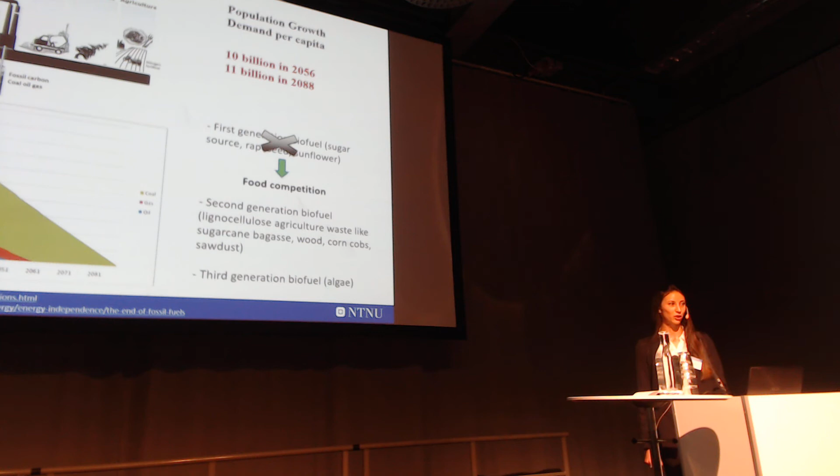And we also have the second generation that is based on the lignocellulose, and also the third generation that is algae. The third one is also interesting, but I will focus on the lignocellulose, and especially the lignin that was supplied by SP1 company. And in my presentation, I will try to combine the lignin and provide a solution using the fast pyrolysis that was presented by Gerhard. So this is the lignin structure. As you can see, it's a very rich source in aromatic compounds, and this part is the most abundant in the lignin structure.

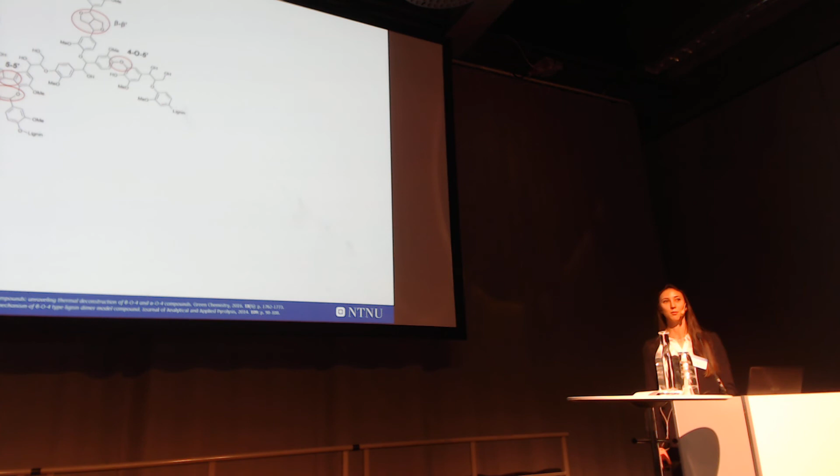If we extract this element in the fast pyrolysis by retro-ene reaction, we actually decompose it into compounds B and C. C, through tautomerization, is converted easily into guaiacol. However, compound B can be converted into different products like vanillin, guaiacol, creosol, apocynin, and many other products. As you can see, they are very similar. They have this hydroxy and methoxy group.

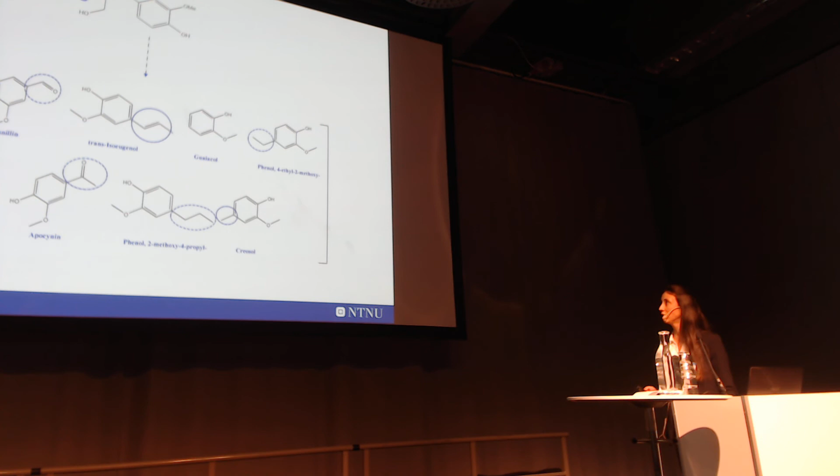The main difference is the side chain in the para position, and all of these can give CO, C1, unsaturated and saturated C2 and C3, as well as CO2. From the methoxy group, we can produce methane, as well as CO and CO2, and from the hydroxy, we can produce hydrogen and water.

So, as I mentioned, in my master thesis I used two types of reactors: a pyrolyzer connected with the GCMS and a fixed bed reactor. The micropyrolyzer is very interesting to screen very fast different temperatures and different catalysts, but it's not very useful if we want a view of the quantitative analysis. We can only see what we can produce, but we are also interested in how much we can produce of this biofuel, solid, and gas.

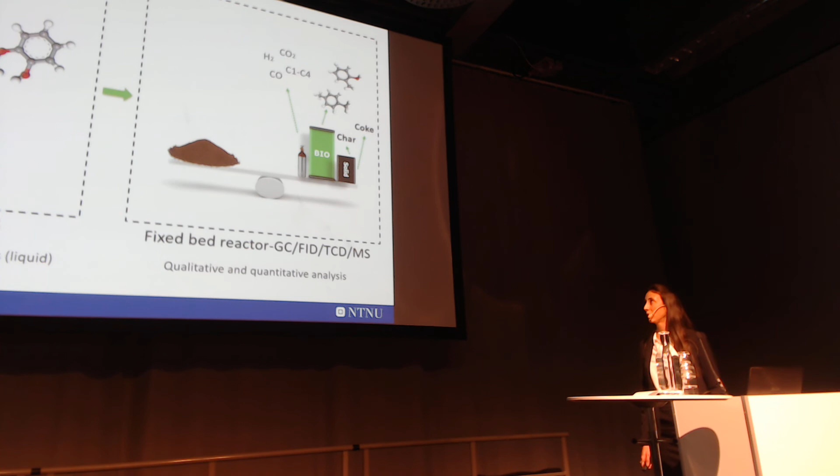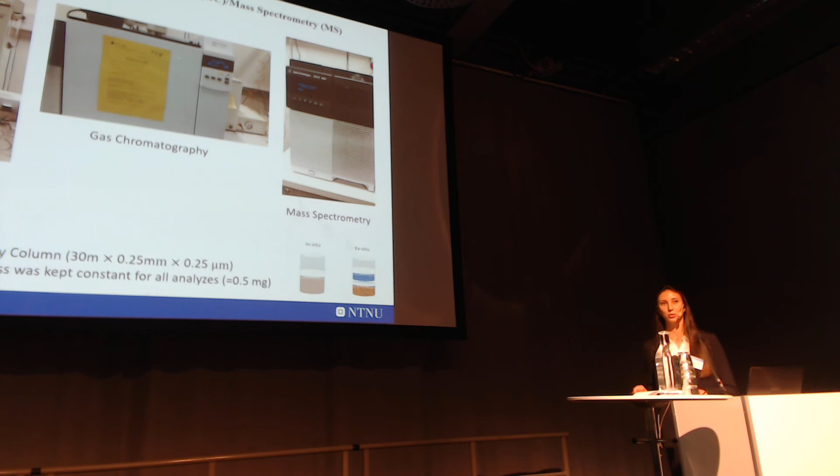So this is the micropyrolyzer. It can use up to 0.5 milligrams of lignin in one run, and we have the fast pyrolysis, with the lignin and the quartz wool that keeps the biomass inside, and we have the ex situ process. Here we have the lignin, the quartz wool, and the catalyst. We first generate the vapors in the fast pyrolysis, and then the vapors go to the catalyst bed and get upgraded. That's why we call it catalytic upgrading.

The fixed bed reactor is actually a tailor-made entrained flow fast pyrolysis reactor. Here we have the catalyst bed between the two quartz wool layers. We insert the lignin from this point into the reactor, we have the fast pyrolysis, and then the vapors go through the catalyst bed. I used this piston mechanism in my master thesis, but we changed the design of the reactor a bit, and now we have two ball valves with the lignin between them. We can pressurize the space between these two valves.

Pressurizing up to, let's say, 1.5 bars helps us flush the lignin inside the reactor, because biomass behaves like an electrostatic material, it always tries to stick to the wall, and it's not really possible to flush it into the reactor otherwise. By opening the second valve, we insert the lignin into the reactor. By closing it, we can charge the upper part again. In this way, we can assure a semi-continuous way of feeding.

And according to this, we can have kinetic insight, and also study the deactivation of the catalyst. In this part, we have the condenser, and here we have the gas collection that is further analyzed by GC-FID, MS, and TCD.

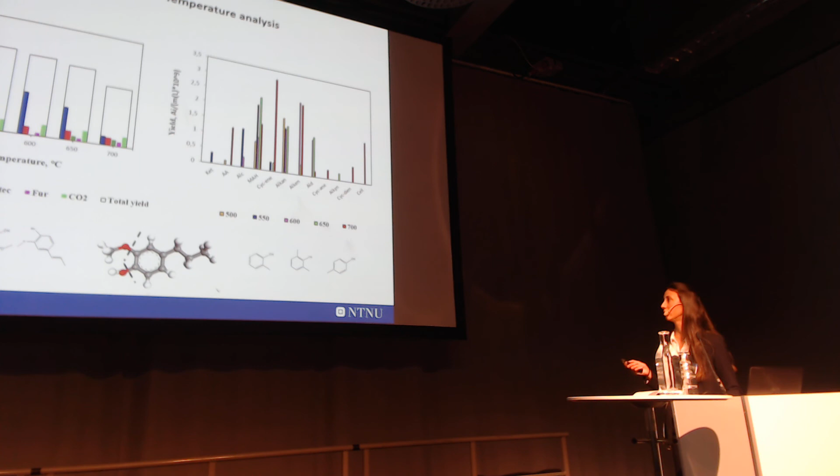In my next slide, we also tested different zeolites. Here we can see ZSM-5 with different acidities. The number means the silica-alumina ratio, so a higher number means lower acidity, and a lower number means high acidity. As you can see, higher acidity promotes the formation of monoaromatics as well as aromatic hydrocarbons, compared with 280, which produces a lot of alkoxy phenols, and we don't want this in the final product. We also tested ZSM-22 because it has a similar pore size to ZSM-5, but it doesn't produce so many monoaromatics and diaromatics.

We also studied SAPO, but it has a much smaller pore size compared with ZSM-5, so it is not able to convert them, because the large oxygenated compounds don't fit into the pores. We also analyzed the pore size influence, as ZSM-5, H-beta, and HY have a big difference in pore size. As you can see, by increasing the pore size, we promote more diaromatics than monoaromatic hydrocarbons, while HY has quite the same product distribution as ZSM-5. This is because of the structure of the catalyst.

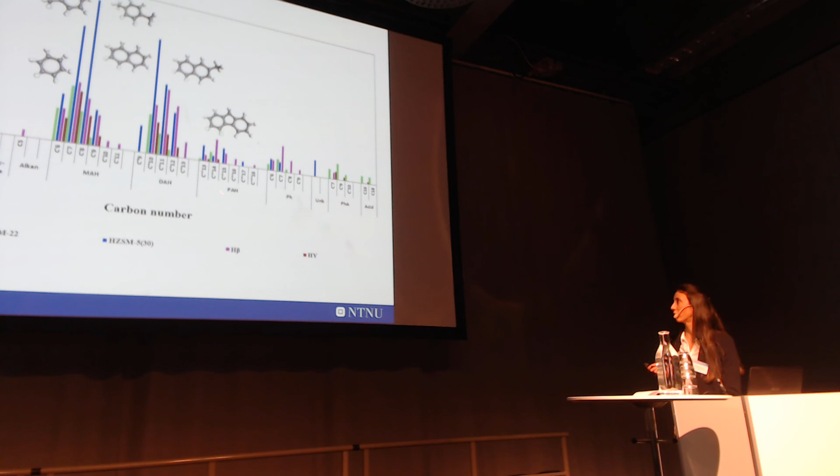If going to the products distribution, we can see that the monoaromatic hydrocarbons are mostly toluene, benzene, para-xylene. In the diaromatics, we have naphthalene, we have 1-methylnaphthalene. And for the polyaromatics, it's the fluorene.

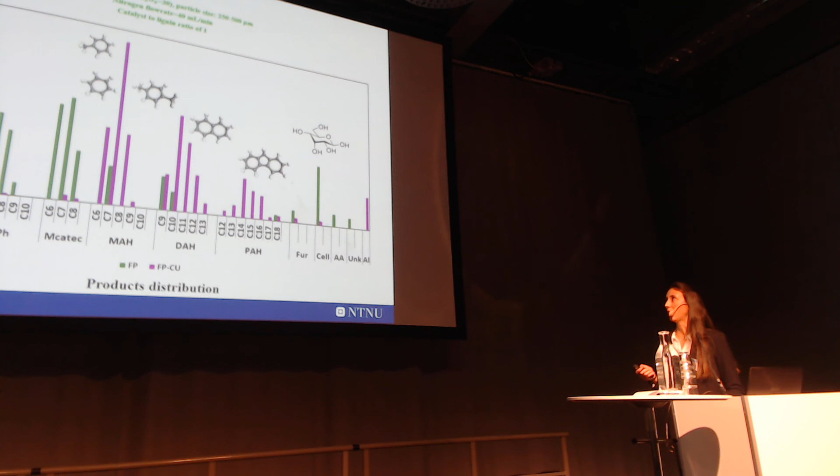If going to the products distribution, we can see that by using the catalyst, we actually shift the oxygenated molecules to the unoxygenated molecules that are aromatic hydrocarbons. And compared with the micropyrolyzer products distribution, we produce the same compounds, and also the monoaromatic hydrocarbons are in high content, as well as for the fixed bed reactor.

Going to the conclusions, because of the similarity of these two reactors, we can say that the tailor-made entrained flow reactor is quite promising to have an insight of the qualitative and quantitative analysis, as well as we can use it for the study of the deactivation of the catalyst and also the kinetics, that is very important.

And also from studying different types of zeolites, we can conclude that ZSM-5 is still a promising catalyst because it has the proper pore size to produce these monoaromatics, and the pore size also inhibits the formation of the coke inside the catalyst.